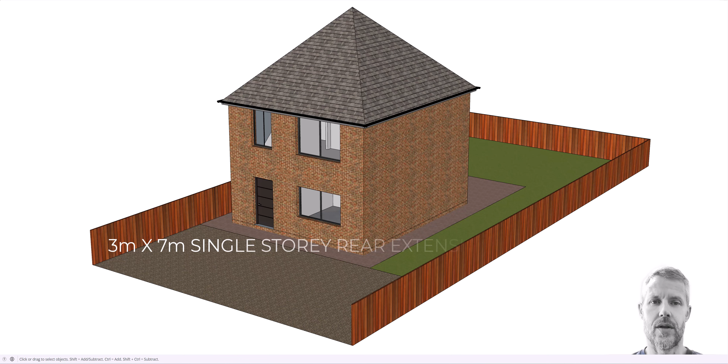At the start of 2024, I did a cost analysis for a single story extension to the back of a house. It was 3 metres by 7 metres wide, single story with a pitched roof. We broke down the cost of each element in terms of foundations, brickwork, roof, tiles.

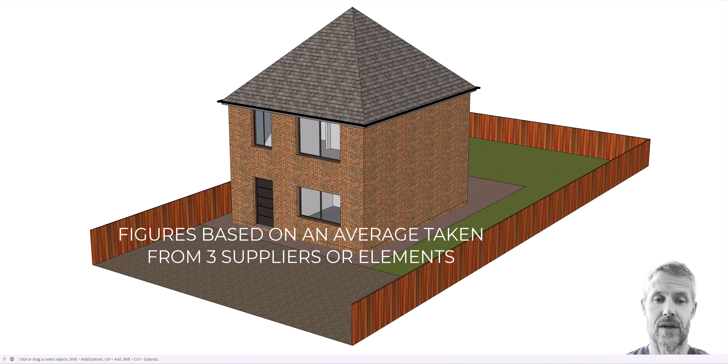The way I established the cost was I took 3 prices over the internet, everything was solely internet based, and found an average for the cost of that element or material, whichever it was. We put all this into a spreadsheet, which I've made available for people to have for free to help them when working out building costs for extensions and things like that.

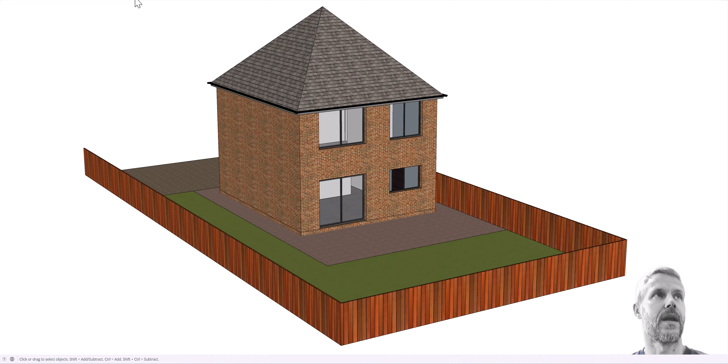To briefly look at the house, it was a rear extension. That was the front, this is the rear. That's with the extension.

Elements that we looked at: excavations, drainage in the excavations, different types of footings, specialist footings. We kept it simple for the exercise and did standard footings with brickwork, added a floor slab, added walls, a roof carcass, roof tiles, insulation, plastered out, a structural opening, and then obviously the completed project.

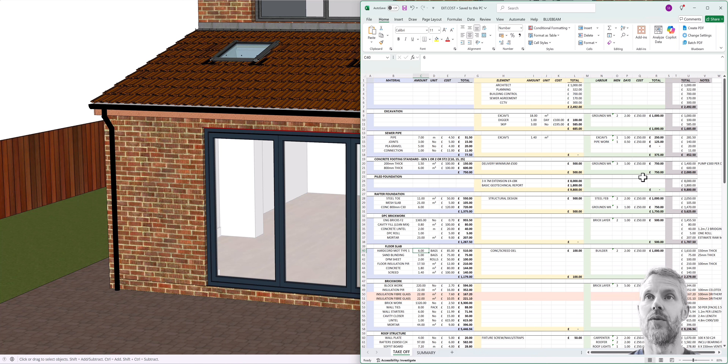The initial spreadsheet gave us a breakdown of all elements and the amounts we'd need in costing up the extension to be built. We looked at materials, we looked at elements, for example architects, diggers, kind of sundries, and then we looked at cost of labour, roughly how many men it would take, how many days to do the work. I've now compared this to 2025.

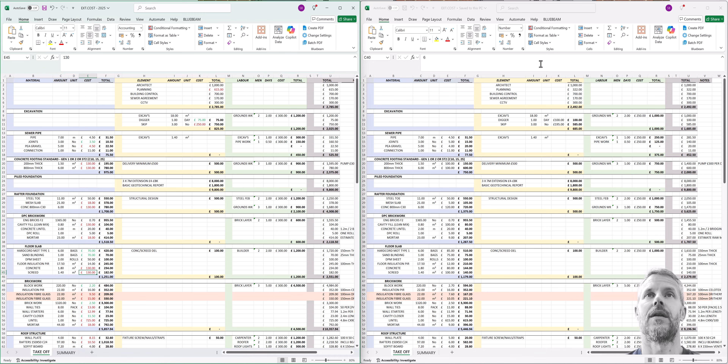On the left here we've got the 2025 breakdown, on the right here we've got the 2024 breakdown. Any element in red is where costs have increased, any elements in green are where they've decreased. So I'll briefly go through all the elements that have increased and then we'll have a little comparison at the end. I'll talk about planning and labour costs towards the end.

If we can see straight away, in terms of a digger during the excavations, we're saving what looks like about £25. In that case we had £100 there and we've got £75 on the latest costs.

In terms of skips, originally we found them for £195, looking more like £250 nowadays. In terms of the sewer, we've got an increase in pea gravel, we've got a decrease in joints for the pipe work. In terms of concrete, we've got an increase of £130 from the £100 which we originally found.

That will run through on various other items as well because the concrete comes up in a number of factors.

So if we scroll down a little, we've got let's get onto brickwork. In terms of brickwork below DPC, again we've got the increase in concrete, we've also got an increase in mortar compared to what we originally had.

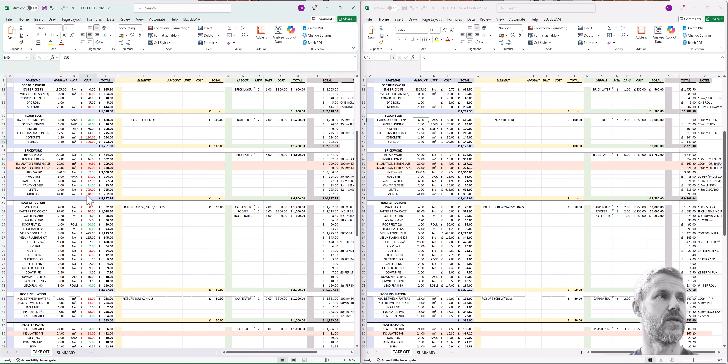Lintel, concrete lintel—no sorry, that is a metal lintel—has increased from 625 to 725, and mortar, which again is an aggregate, has increased.

In terms of the roof structure, we've got an increase in the timber from £5 to £8.15. That'll be for wall plates, so that'll knock and affect the rafters as well, and they've gone from £6 to £10.50. Soffits and fascia is about the same.

Roof felt has decreased from £96 to £60. Roof battens have decreased slightly by the looks of it, from £1.25 to 60 pence.

The dry verges, which are on the edges of the roof, have decreased. I think I did that as per number, that's why it's slightly different when I looked at it. But they've decreased to about £2, where I think they were slightly more, they might have been about £2.50 before.

In terms of guttering, that's increased slightly, and so have gutter clips, only marginally from like £50, but the joints have increased quite a lot from £2.70 to £6. Gutter outlet has increased, it looks like it's doubled as well, from £4.50 to nearly £9. And lead flashing has actually decreased quite a lot.

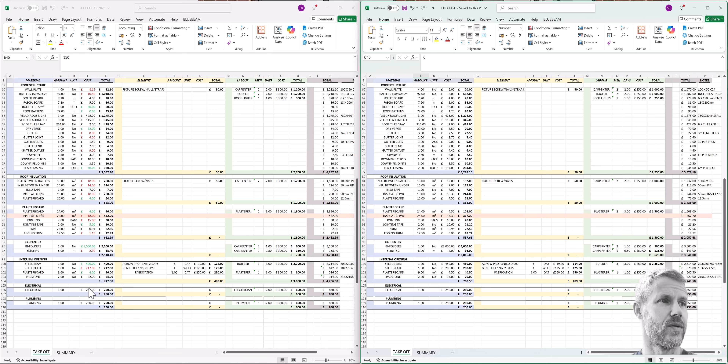Again, they've got the plasterboard increase on there. I've kept the electrical the same at whatever cost that is, the same as the plumbing as well, because there's a fairly specific jobs which will be priced during the construction of the project.

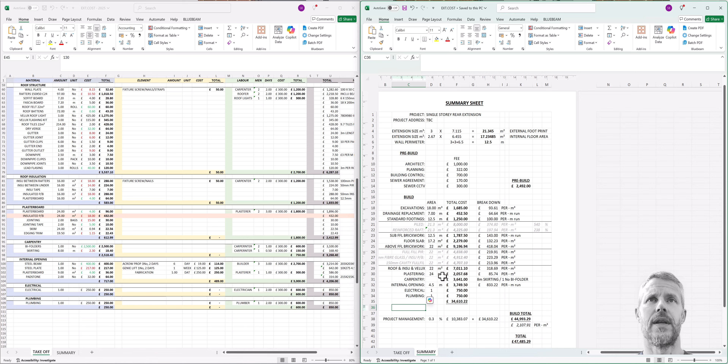Now, if we go into the summary of both, we can see our increases more specifically in terms of each aspect.

So the excavation has gone up from just under £1,700 to £2,000. The drainage has increased by around £100. Standard footings have increased as well.

Oh, that's red. Only marginally by £150.

The sub-floor brickwork has increased by around £400. The floor slab has increased by around £300. And above brickwork has increased by over £1,000.

Your roof insulation velux has increased by nearly over £1,000, and the plastering has increased by about £300 odd. A bit of a decrease in the carpentry, which is the woodwork, and I think I found the bifold is slightly cheaper as well. The internal opening has decreased slightly.

Increased slightly by a couple of £100.

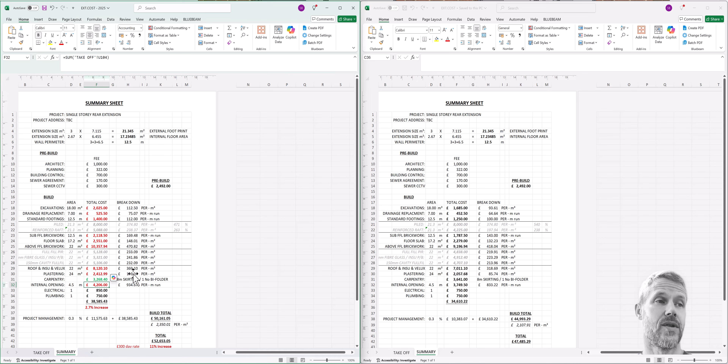So overall, the cost difference of materials alone was £34,600, and we've gone up to £38,500. So we've got about a 2.7% increase in materials.

So as I mentioned, the other couple of elements was the architectural. So yeah, fees may well have gone up because we're looking a year ago to 18 months ago, so fees might have increased. So I originally had £1,000 there, that might have increased.

I know that planning's definitely gone up, and that's gone up to 615, which is quite a large increase. It's actually doubled the planning fee.

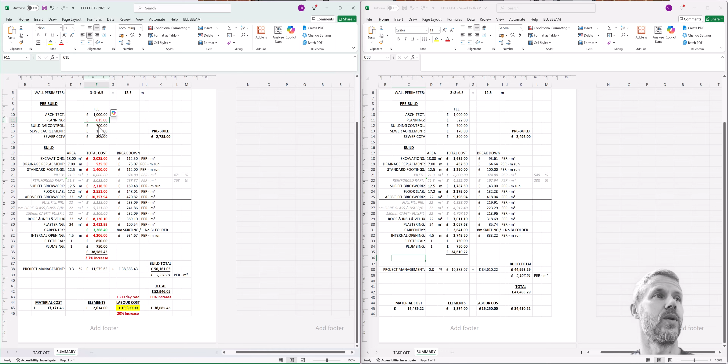As building control would have gone up as well, that fee would have increased because they do pretty much every year. When I've been doing sewer agreements, they're about the same, a few pence difference, so not major. And CCTV surveys, which would be whatever's being charged at the time, to be honest, so I've kept that the same.

The one thing I have increased is the labour cost. Originally I looked at £250 per man per day, just as an average, because I'm going to break it down into what each labour does, as in carpenters, plumbers, or roofers, whatever. So I just kept it fairly simple.

Due to cost of living, I've actually increased that to £300 a day, and that does give the biggest increase of around 20%. So whereas before the labour would cost just over £16,000 at £250 a day, that has increased to £19,000, which is a 20% increase.

So overall, we've gone from 47 to around just under £53,000 in 18 months.

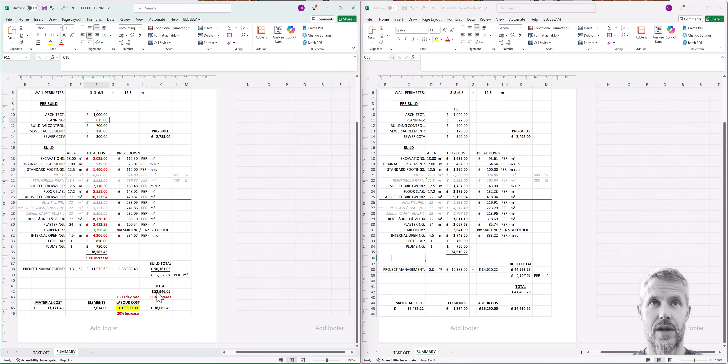Let's say all prices are taken off the internet. I did a comparison in terms of looking for 3 different prices from 3 different places and finding a bit of an average. And I've had to take a few assumptions as well on what things would cost.

But we can see as it's increased, not as bad as I thought it would be actually. I think more so the cost increase is from labour and the cost of actually doing the work. But feel free to leave any comments. Thank you for watching.